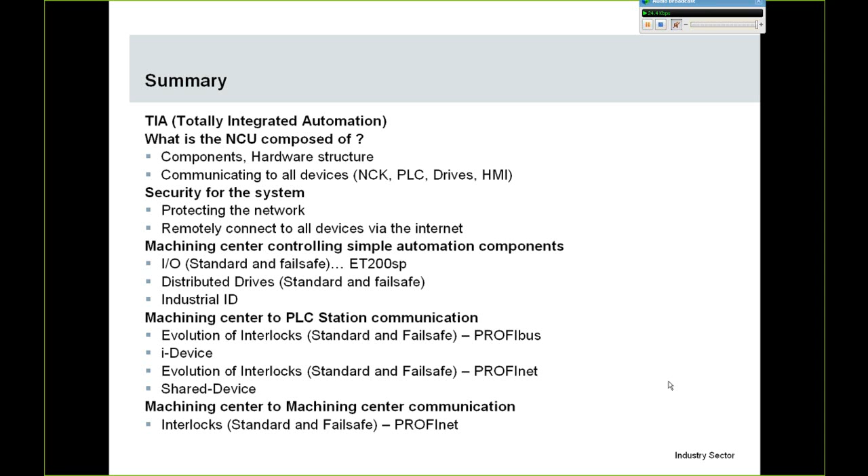So to start off with, we're going to look at our Sinumerik 840D controller. This is the NCU 7X0.2 or 0.3 PN. The 7X0 stands for a possibility of having a 710, which is our lowest axis limit, up to a 730.3. All have the exact same components inside of it. It's just how many CNC axes you can do with it. But for the most part, this is going to be the exact same for each of these.

And inside of this NCU that we show on the screen are several components, one of which is the NCK. This is the intelligence of a CNC operation. We also have embedded a PLC, the exact same PLC that you would find on a standalone automation system. This is nothing different than a regular PLC you can get from a distributor. In our case, inside of our NCU, we have a 317-3 PN/DP inside of this controller.

We also have a drive controller board. If anybody from the motion control background is familiar with our control units, we have kind of a distributed drive setup, but it is all controlled by a central drive controller unit. This we find already inside of our NCU. We also have a running HMI system running off of an embedded Linux operating system.

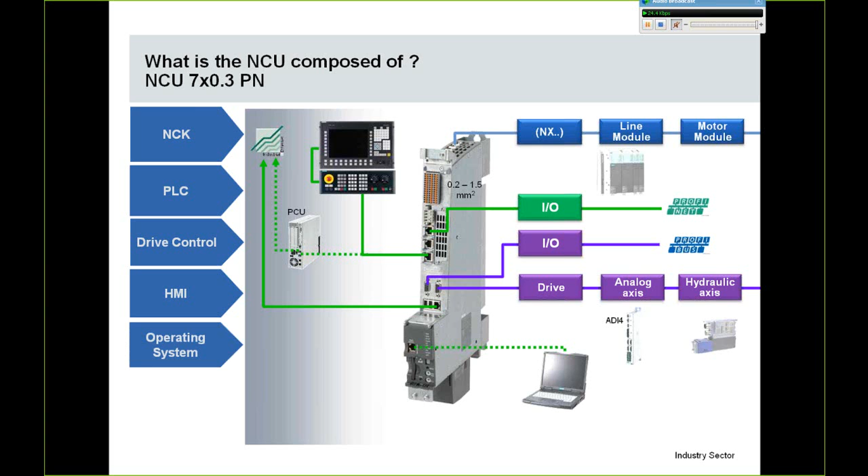And then, like I mentioned, this is running on a Linux embedded operating system, which we find here inside the NCU, and with every operating system or every PC-based system, we have a flash memory storage. Now, that's equivalent to something you would have on a Windows-based system. This, of course, is all embedded, all contained in this one unit.

It operates similar to just any PC that you've had in the past, but it contains a lot of the components of it, but is a lot simpler to operate and to program. So having said all that, those are the major components.

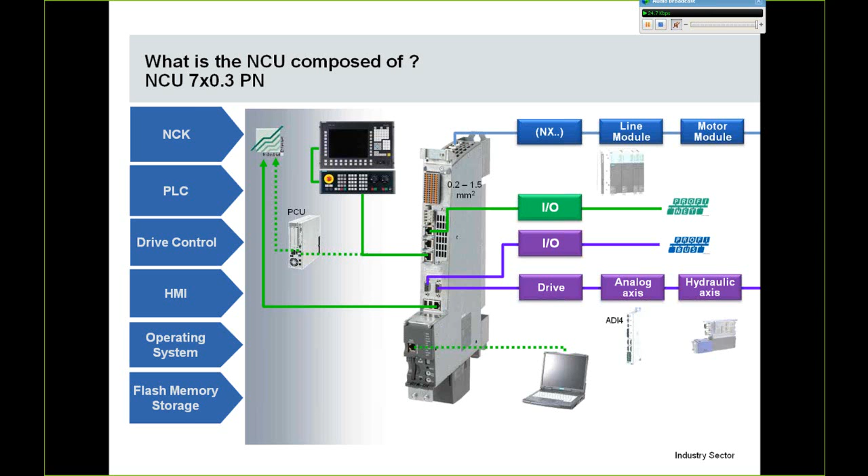We have components that we can control off this main NCU, like our operator panel you see here on the left-hand side, with a machine control panel, which is nothing more than just standard I/O. We have our drives that we control, standard and safe Profinet I/O, also standard and safe Profibus I/O, and if we needed to control regular drives, analog axes, or hydraulic actuators. These are all components that this NCU will communicate to.

So inside of a typical automation system, we have several components that are necessary, that make up the system. Like I said, we have a PLC that's usually the intelligence, the center of your automation station, with the progression with end users looking to make their machinery more safe for their operators to use, and also to prevent different machine crashes or technical issues that could run into.

We're seeing customers move towards a fail-safe logic controller, whether that's in the form of a PLC or some sort of safety relay system, things like that. But that is usually an essential element to a new automation system. We also have the need for communication processors, sending large amounts of data up to a factory network, some sort of control of rotating drive systems, whether it's a speed or position or even a torque control of a conveyor system possibly.

You're always going to have an HMI, some way to interface the operator to your automation system. And then the storage for any log files or possibly data that you want to save, for example, recipes or alarm logs, data history, things like that. Those are all the necessary components you typically see.

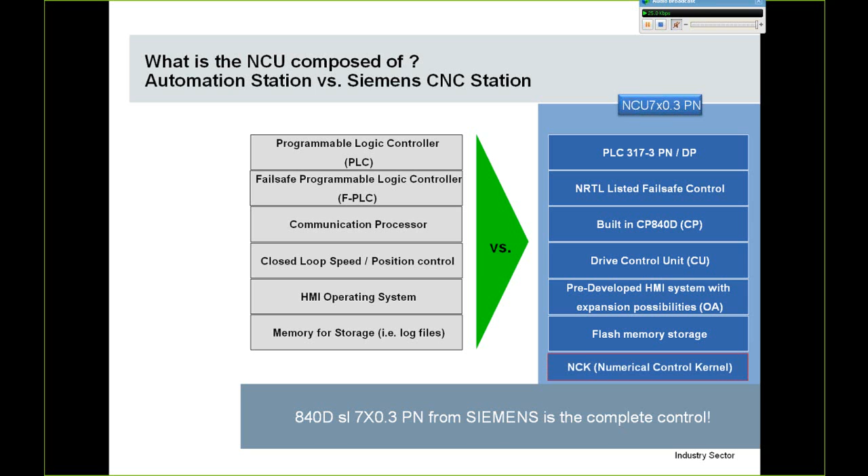So those are the typical components of an automation station. You can see that we have all of those components, plus obviously one additional one, which is our intelligence to the CNC system. So we have three ways we can communicate to this NCU and to get into all of those components that I described in the slide before.

We want to access not only the PLC to change ladder logic or to edit the hardware or I/O, but we also want to add information to our CNC, or we want to tweak what we see on our HMI screens, or communicate data to our CP card, or write or read data from our flash storage. We can do that in one of three ways, or one of three ports, all Ethernet driven, but we have our first one, which is our X120 network, our thin client, our HMI network.

Typically on this network, you may have a programming port, you may put your PC into it, but it's more or less Sinumerik or Siemens components that sit on this network that don't leave the machine, because this is a network that is going to be duplicated from automation station to automation station. So you're not connecting this outside of the machine environment.

This does not leave the factory or leave to the factory. It stays right at the machine. We also have our X130 network, our factory network, which will go up to the factory communication servers or information servers. What I see typically in automotive is we will put our programming ports on here.

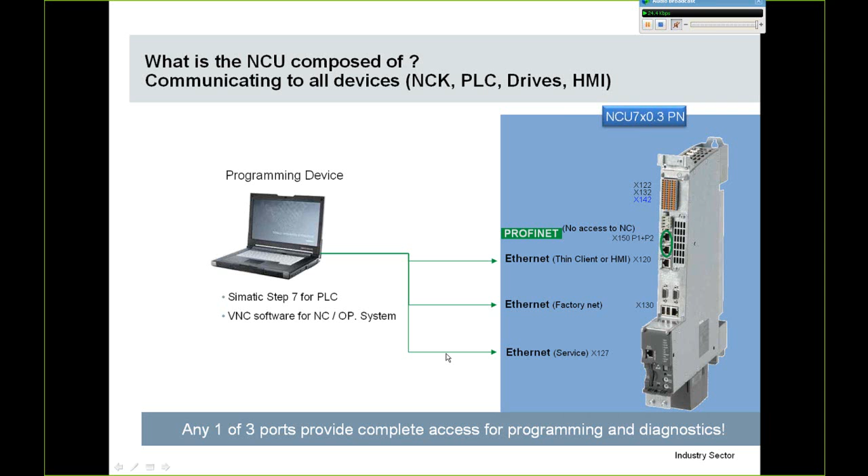Okay. Now we've talked about different ways of communicating to our NCU or to our automation station. They're all Ethernet driven. We've connected that to our plant network, but we want to make sure that we can protect that network. We don't want access to that network from outsiders, whether that's outside the plant or outsiders that don't have the correct permission or security to get into our network to see the information.

We want to restrict that. We want to secure it. So we're trying to prevent espionage or, like they say, data manipulation. This is a very serious issue to most companies. And what we can do is we can put on different Siemens products, standard automation products or standard factory automation components to secure or put our factory network or a machine network behind a virtual private network or a VPN. So we have 3 or 4 different components that we can use to secure that network.

What we're going to be focusing on mostly is customers trying to access from their home base or wherever their OEM facility is through the internet to the end user. This is the most typical situation. They're going to be doing this over the internet, and they want to get into the Sinumerik or Simatic controller, whichever one is their preference. So we have a few different ways we can do this.

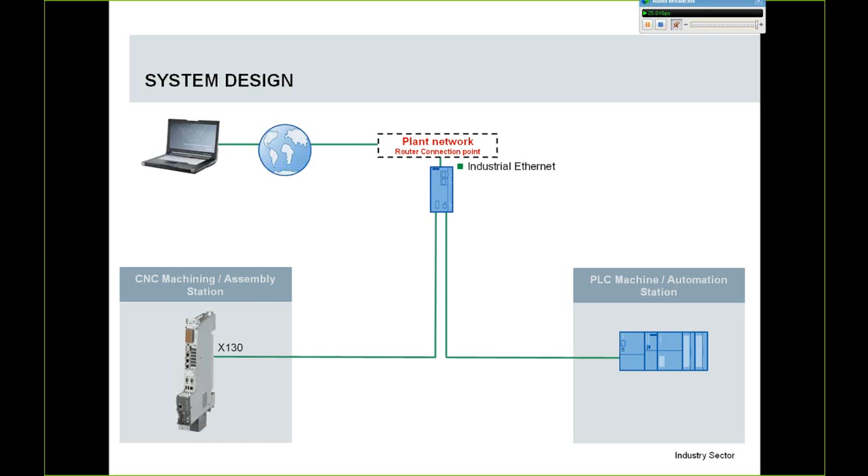So moving on into the next area that we're going to talk about is our NCU, or machining centers, controlling simple automation components. Our first and probably our most commonly used automation component is our machine I/O. What options do we have from Siemens, and what do we offer to be controlled from the Sinumerik 840D, from our CNC? We have a wide range of components to suit your needs. Different I/Os serve different purposes.

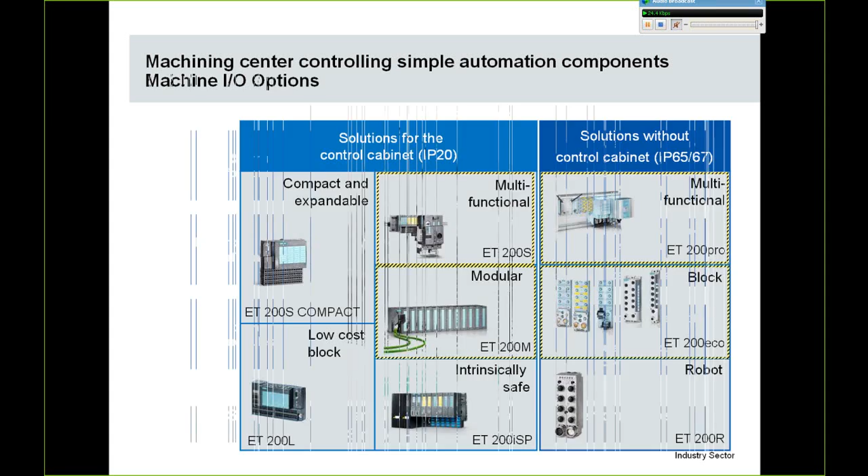We have 4 of the I/Os that you see on the screen here that are safety rated, which means we can get PROFIsafe or safety capable inputs and safety capable outputs on both our ET200S and ET200M, which sit inside the cabinet, and also the I/O that sits outside of the cabinet, whether it's rack-based, like our ET200 Pro, or module-based, like our ET200 Eco. So we have a wide range of I/O and even ones that are capable of producing our safe I/O, which can be controlled either by our fail-safe PLCs or our CNC.

Just recently, we've released a new line of I/O, which is our SIMATIC ET200SP I/O. We currently have the ET200S. This is slightly different now. We have a smaller footprint than the ET200S we had in the past. We have a couple advantages of using this. One, with the ET200S, we never had the capability of doing 16-point I/O. With these modules, we do have that possibility. We have 16-point input and 16-point output modules.

We also have something a little bit unique to the system, and it's power modules that are integrated right into the terminal blocks, or the base unit as we call it now. In ET200S, we had a dedicated power module and its associated terminal block. With these modules, we have some terminal blocks or base units that are white in color, which stand for the beginning of a power group, and then we have other colored terminal blocks that stand for getting its supply voltage from the component to its left.

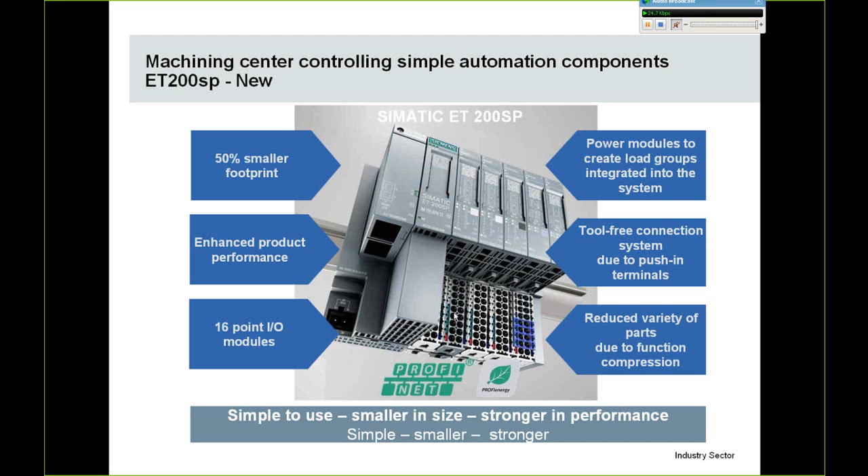So a few of the features of this ET200SP are made for quicker installation, easier installation, and simpler installation. So those are a couple of the features now with these ET200SP I/O, and again, this is new to the market, but because we have a standard or similar platform to the regular PLCs, we do support this on our 840D sl controller. So this is now an option over Profinet.

With every automation station, you typically need some type of motion, whether it's positioning motion, whether it's just standard turning on a motor, controlling the speed of that motor. If it's a conveyor system, on and off is simple enough, or if you want to vary the speed, or a rotary table, for instance, on a conveyor system, you might have to realign the part, or invert it or flip it upside down. These are all common tasks that machine tool builders are faced with.

One of our new products that we offer is what's called the G120D with positioning. The G120D has been around for quite a while, and what it is is a decentralized drive, the D in the name. We mount this drive or this inverter right onto our conveyor system. No need for a cabinet. No need for additional wiring out to our motor. We simply mount the drive right at the location of the motor and connect our motor directly to it, so that we've limited the amount of cabling and eliminated the need for any enclosure, things like that.

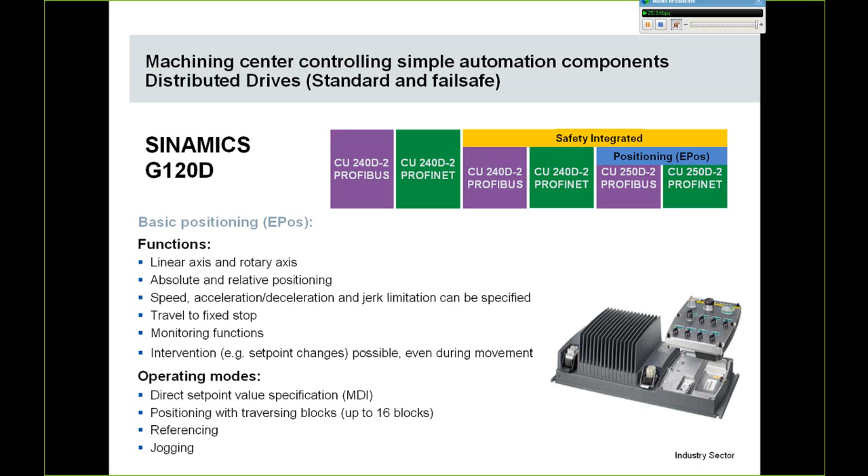So multiple purposes of control, enabling communication for speed and positioning, but also communication for safety enabling, can all be done through our bus from either our PLC or our 840D to this drive, and to many other drives in the Sinamics umbrella, like the S120s or G120s, along those lines. So distributed drives or standard cabinet-based drives are all devices that we are able to communicate to.

Now, probably the last component that we're going to talk about with automation components is standard RFID, industrial identification systems, like RFID units or barcode or data matrix readers. These can be brought back right into our I/O system, our Profinet or Profibus systems directly. We can read the data that are on an RFID tag.

A simple example of what we use in automotive is an RFID tag stays with the pallet every time a part goes into a machine. We machine it and then update the tag with information. And that tag stays with the part through its entire life of machining.

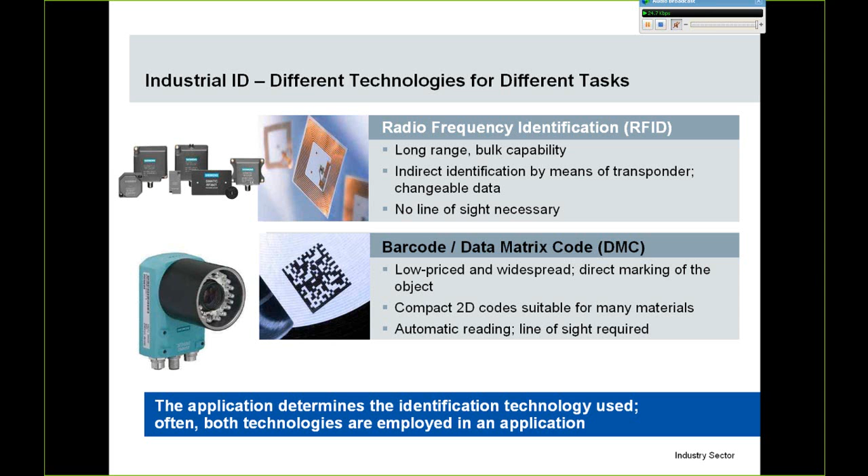We also have a barcode or a data matrix scanner, a similar application, but kind of a different concept. We have a matrix on the part. When that part comes in on a pallet, we read the matrix, but then we access either a main central PLC or a server for the information on that part to figure out what's been done so far to it, machining steps, and once we machine it, we basically update the server, which is referenced through that data matrix code.

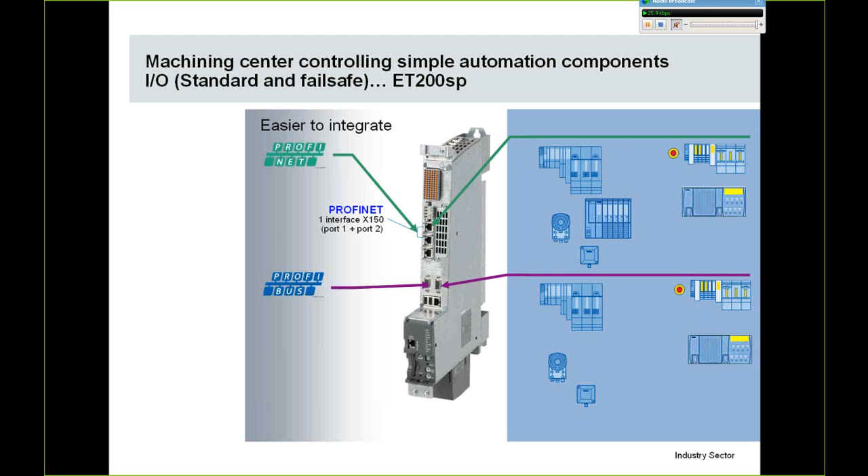So all these different components, I/O, regular I/O, safe I/O, regular distributed drives or safe distributed drives, regular cabinet-based drives, industrial identification systems, all can be communicated to through two different systems, our Profinet I/O system or our standard Profibus system, all connected to the front of the NCU or on a standard PLC-based system to a regular PLC.

So back to our system design, we've simply added now to our NC the communication, regular communication to our ET200 I/O, and also safe communication. One connector, one cable, one Profinet cable from the control to the I/O, but serves multiple purposes. And then on to our RFID and our distributed drive. We've also done the exact same thing on the right-hand side for our standalone PLC-based system.

So I think the last step we all see coming is how are our PLCs going to be communicating with each other? And this is obviously a major task that each automation or each machine tool builder is faced with, because a lot of times it's not the machine tool builder interlocking with his own hardware. It's to other customers that they have to interlock or share data with. So this tends to be quite a bit of a process, and typically is only done at the end user.

When the machine is finished, all the interlocks are jumpered out or somehow disabled, and when the machine gets to the end user, there's quite a bit of work involved to get these interlocks working. So we're just going to look at the evolution of interlocks and what we do on a Profibus system, what we've done in the past, and what we currently are doing. So on a standard system, you have an NC and a PLC, or two PLCs or two NCs. And we have our safe I/O or regular I/O.

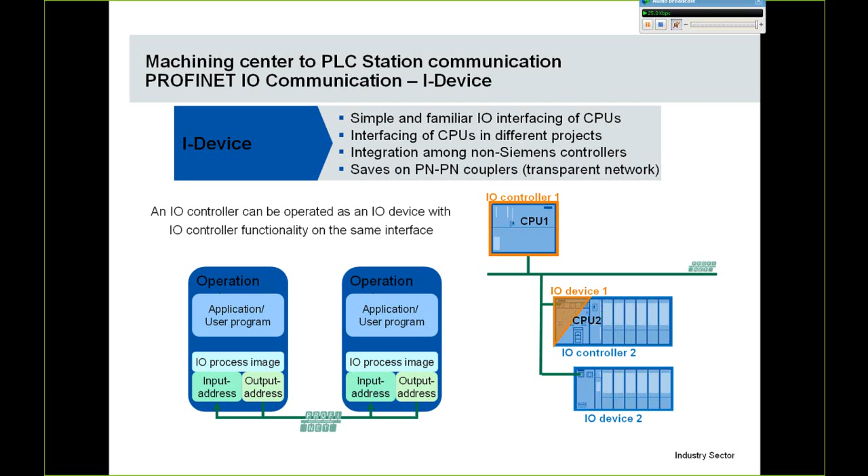All the communication would be set up. We would have the I/O address lengths already set up inside that module. That's essentially what we're doing with the I-device, but it's all software driven, all connected and set up through Step 7. So back to our evolution of interlocks here. In Profinet, we have our standard hardwired interlocks, nothing great.

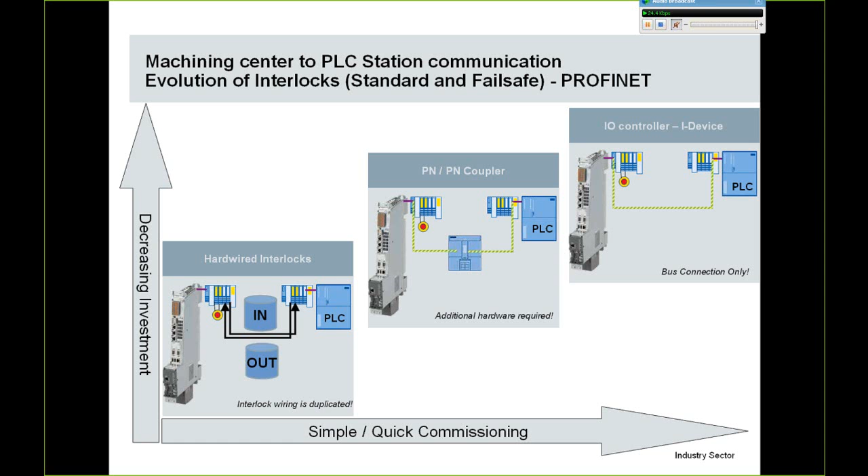And then we transitioned from a DP to DP coupler to a PN to PN coupler. We still needed that extra piece of hardware, but this is all software based, which is great. But now we have our I/O controller, I-device, and we do this all over one connector, one cable, no additional hardware, and no reason to redundantly wire our e-stops or our simple interlocks. And that's really the key. Less wiring, less setup, less hardware, and easier installation is what we're trying to show with this I/O controller.

Now to take it one step further, we also have a function called shared device. Now we have two I/O controllers, two PLCs on a system, and we can communicate to different I/O modules inside of one rack based on our configuration setup. This is going to be useful, I think, for longer, bigger machines where you might have split stations or multiple controllers, one at one end, one at the other, and I/O points shared

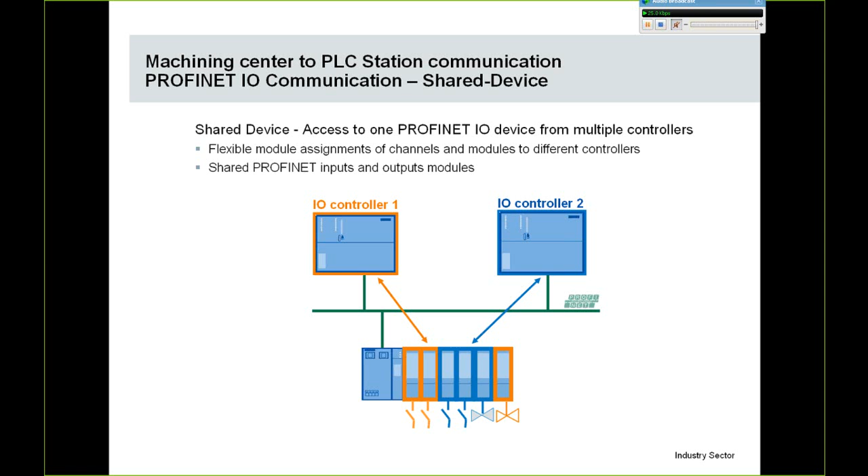between the entire machine. Instead of purchasing multiple interface modules, one for each I/O controller, and then multiple input cards, one for each interface module, we can now combine them all, use the common interface module, and just point to what card we want to communicate to, and tell the I/O controller that you're controlling this card. This card's master is controller 1 or controller 2.

So on this example here, on the left-hand side we have a fail-safe I/O controller. He's just interested in the fail-safe I/O, and then we have a second I/O controller. He's interested in the process I/O. We've had to purchase an interface module and an I/O card for

basically each controller. Now we can move to a new solution with the shared device to combine the rack, but say only one card is being controlled by me and the rest of the cards are being controlled by I/O controller 2. So not as much cabling, not as much hardware, simple to engineer, easier to implement. So I think that's a benefit for everyone. So these are a couple of the solutions that we have with Profinet now.

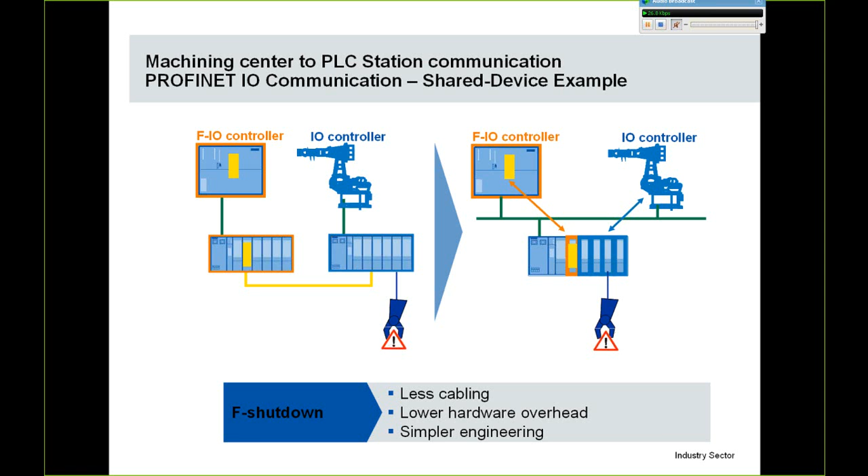We've had this for a little bit on a standalone PLC system, and now with our newer hardware in our CNC world that's been around for almost a year now, we now have that capability of doing this all through software. So connecting the two systems back to our system design, we connect the two systems simply by one Profinet cable.

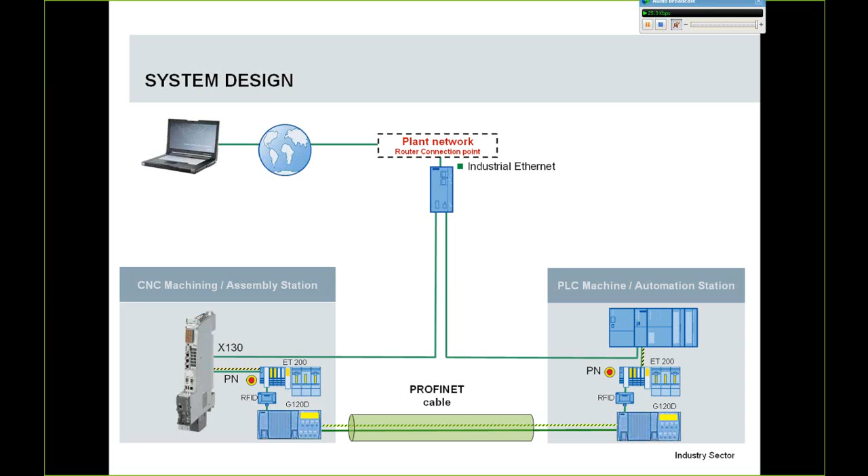The communications through that cable are regular or safety interlocks, but we only need to wire up that interlock one time to get it into our system through an I/O module, and then it can be passed from station to station just simply by connecting a Profinet cable. And of course, everything we do with the PLC, we do with the CNC.

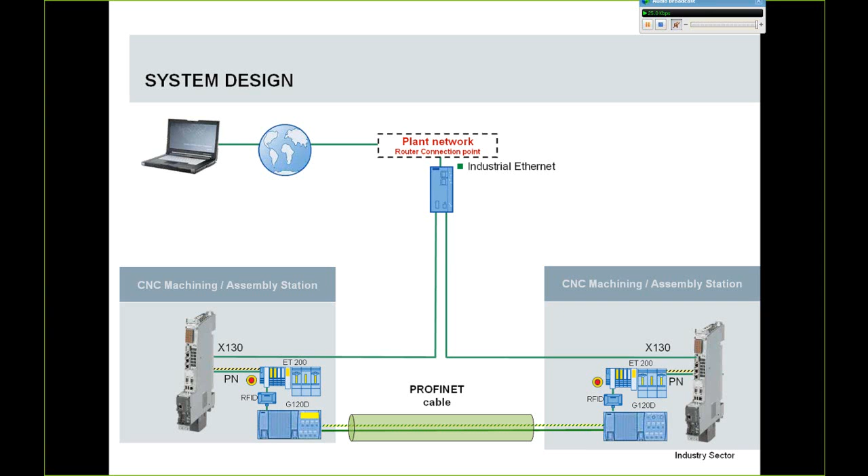So if two CNCs had to communicate together, they absolutely could. No additional hardware, no difference in system architecture. It's all pretty much the same configuration. So that kind of concludes my slideshow.

I'm just going to show you very quickly how to configure I-device on a CNC and communicate it to a PLC. This is all going to be offline, but I think if you can see what we're doing, you'll understand how easy it is, how simple it is, and maybe a simpler engineering for the next stations you do.

I'm simply looking here at my NCU. I have my NCU and all its components and a couple of the buses that come off my NCU. I'm going to double click on my Profinet network, and with the newer systems, I now have this I-device tab.

I can make my NC an I-device and tell it that I want to transfer 1 byte of outputs to the I/O controller, and I want to receive 1 byte of inputs from the I/O controller. So in my PLC logic, if I turn on any of these bits as standard coils, if I turn on Q256.0, that will automatically be sent to the next network, or to the I/O controller. And if I read any of these contacts, I256.0 and so on and so forth, I'll be able to read data that he sent to me.

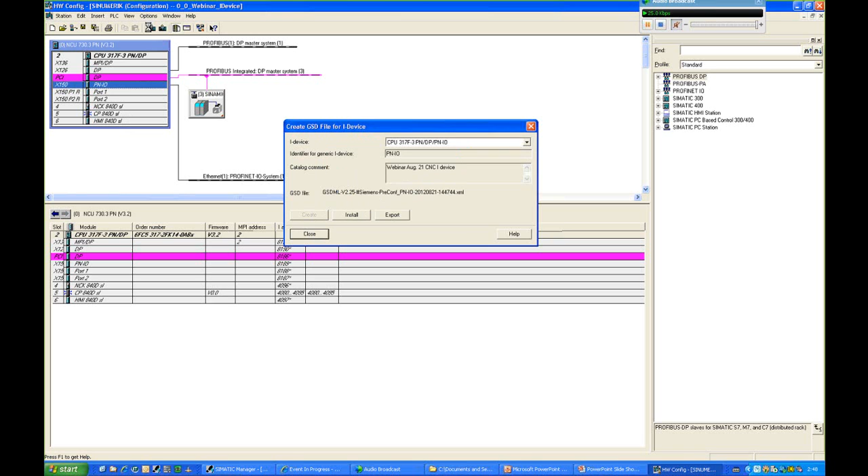So I'm just going to install this GSD here, and it goes ahead and puts it into my hardware catalog. Okay. So I'm going to close this project. That's it for the CNC side. Now I just have to make sure my PLC logic is in there, and I've obviously downloaded this. I'm going to update my catalog and then close off here and go back to Step 7. Now I also have a project. I could have put my I/O controller in the same project. I don't have to anymore. I can put it in a separate project, like simulating a separate machine tool builder.

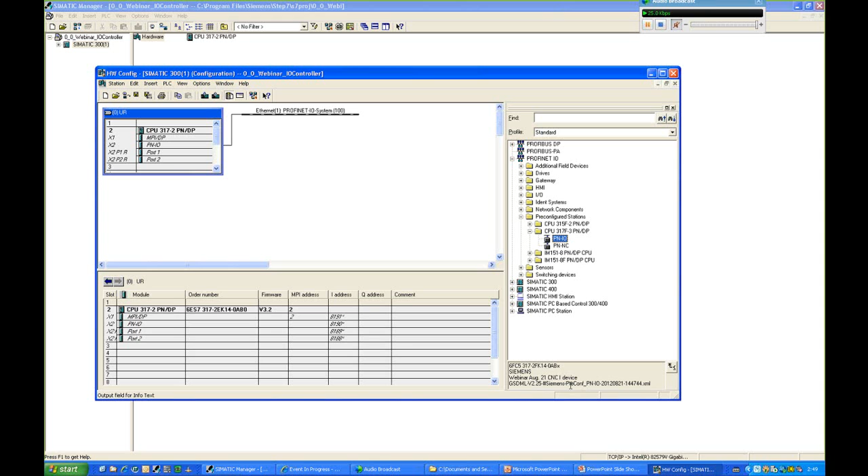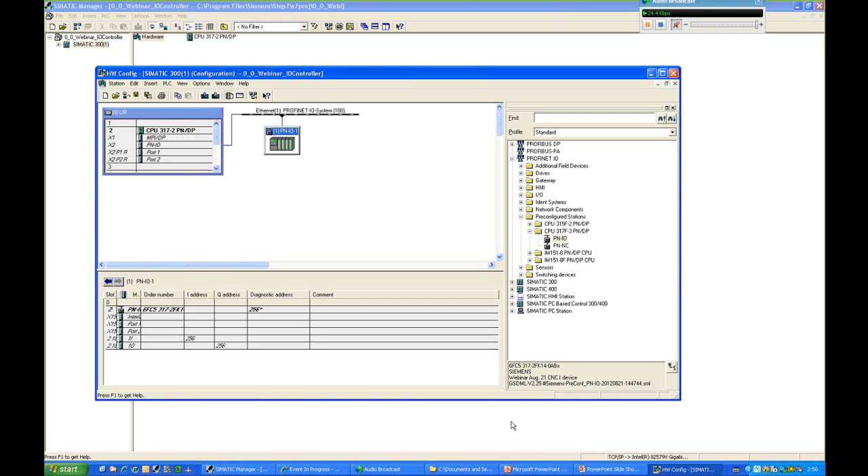And I simply just have to go to my Profinet I/O modules here on the right-hand side and look at my pre-configured stations. And I should see my different I/O devices, or my GSDs that I've created in the last step. And here it is. You can see the description, webinar August 21st CNC I-device. So I simply drag that to my Profinet system, and you can see that my I/O address is already set up. The length and the fact that I'm sending outputs first, which would be the I/O controller's inputs, and vice versa. It's ready to go. If I needed to switch these I/O addresses, I could. I just have to make sure they're 1 byte long. So I save and compile that, and that's basically my I-device setup.

So basically, that's my system. At the end of this demo, I hope you understand that anything you do really in the PLC is seamlessly transferred over to the NC in way of setup. So if you're a PLC automation engineer, chances are you're not going to have too many problems with setting up or debugging a PLC system on a CNC or inside of an NCU. Okay, so that was really what I wanted to show. Everything is totally integrated, and we can, on the CNC side, communicate to many automation components similar to a PLC.